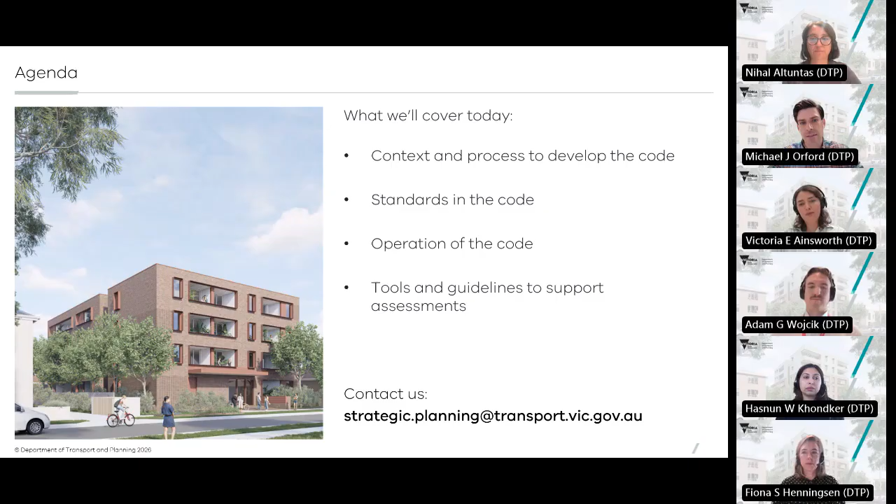Thanks, Michael. So before launching into the detail of the mid-rise code, let's take a brief look at why and how the code was developed. We'll cover the policy drivers, the intended benefits of the code, and what we heard through consultation.

So starting with the government commitments. The Department of Transport and Planning has supported the Minister for Planning to deliver on key government commitments by developing the mid-rise code. Starting with the housing statement, one of the key initiatives from the statement was to streamline planning approvals through deemed to comply pathways. The mid-rise code follows the townhouse and low-rise code in delivering on this initiative. The mid-rise code also contributes to another initiative in the statement, which is to strengthen design standards to ensure high quality builds.

The mid-rise code also plays a key role in supporting the Train and Tram Zone Activity Centres program by establishing a code targeted to the development scale that will be enabled through activity centre catchments. Finally, the mid-rise code also supports the delivery of the Plan for Victoria pillar, Housing for All Victorians.

So early in the process to develop the Mid-Rise Code, we identified the benefits it should aim to deliver, and I'll take you through those now. We were seeking to deliver more mid-rise housing in existing well-located neighbourhoods that have been identified for increased housing at this particular scale, so essentially more people can make better use of existing infrastructure.

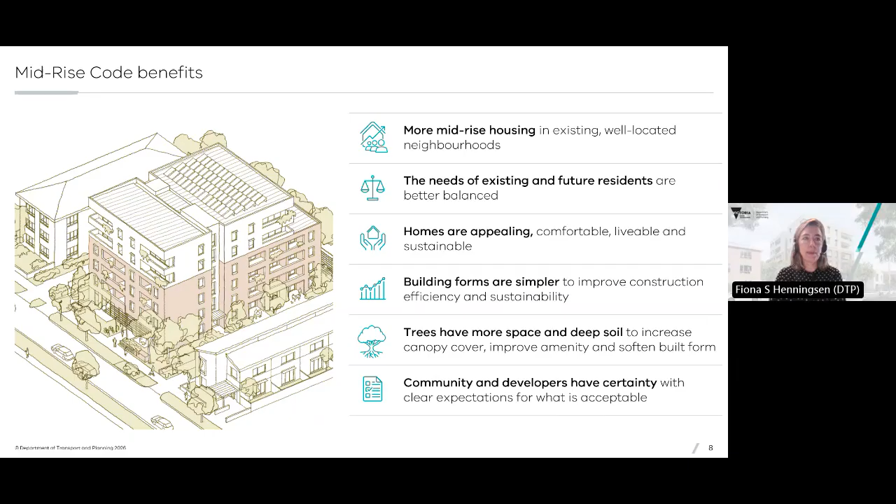Now let's have a look at how the code was developed. To ensure the code could deliver the benefits I've just outlined, we undertook some really detailed testing and analysis. On screen now is one of over 60 detailed architectural tests that was undertaken while we developed the Mid-Rise Code, and that was undertaken alongside economic modelling. So both of these tests considered a really vast array of aspects of livability, amenity and feasibility.

Alongside this modelling, we also convened a technical reference group, made up of experts from local government, design, planning and development industries. This group was really great in helping us test key challenges and opportunities and identify potential paths forward to refine the approach to the Mid-Rise Code.

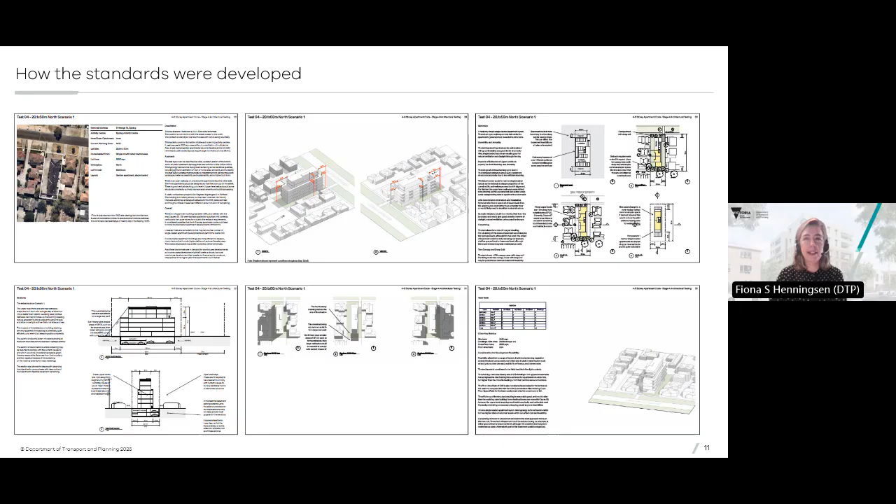The testing and advice also identified multiple options for a range of standards, which assisted with developing the draft provisions. This led us to a period of targeted consultation in September last year. The department undertook 6 weeks of targeted consultation, inviting feedback from municipal councils and peak industry groups. At that time, we shared some background on the proposed Mid-Rise Code, including the intended benefits of the code and the existing challenges and opportunities we had identified at that mid-rise development scale.

We shared proposed standards, and for many of these standards, we provided multiple options for how we could take the code forward. We also shared the proposed operation of the code. We received 42 submissions from local councils, peak industry groups and practitioners during this period, which really helped us greatly in refining and finalising the provisions. So thank you to anyone who's in attendance today that took the time to provide us a submission.

Now let's have a look at the assessment framework and how that will change with the introduction of the Mid-Rise Code. We're going to dive into this in more detail a bit later in the presentation, but just for now we'll work with this overview. Moving from left to right, on the left at 3 stories or less, there is no change.

When we move to blue, previously clause 57 had only applied to 4-storey residential development, and with the introduction of the code, clause 57 will apply to 4 to 6-storey buildings with a deemed to comply operation.

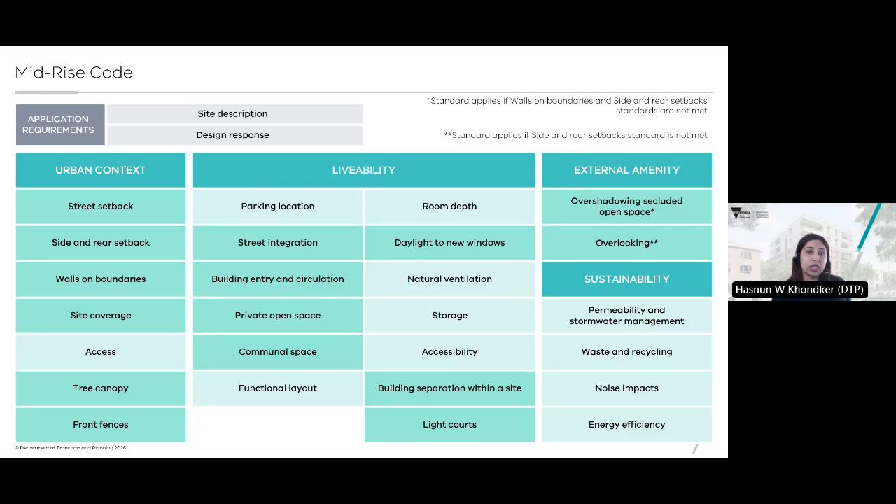First, I'll explain the site description and design response requirements. The objectives of each urban context standard in the mid-rise code refer to responding to future urban development instead of neighborhood character, which is different to the approach taken in Clause 55 neighborhood character standards and the existing or preferred urban context in Clause 58.

Clause 55 standards are compatible with neighborhood character, changing and evolving over time. Clause 58 is a discretionary assessment, where the urban context remains an important consideration. In contrast, Clause 57 is deemed to comply and is intended to facilitate a fundamentally different built form to what exists now. That is why the term future urban development is used in the mid-rise code.

An application must include a site description, a design response, and a landscape plan. A written statement outlining which standards are met and not met is also required.

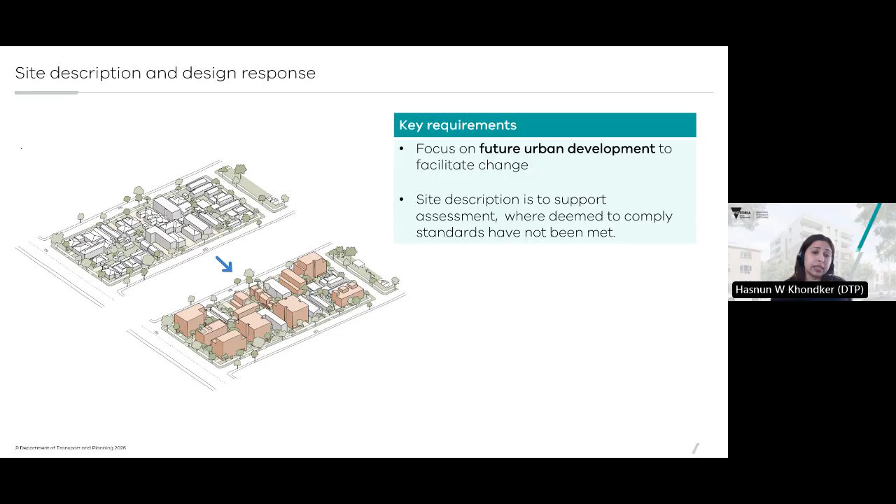Now let's look at the street setback standard. This standard requires a minimum of 4.5 meters from the front street and a minimum of 3 meters from a side street. It is also important to note that there is not a requirement for an upper level setback.

There are a few key benefits to these requirements. Firstly, the 4.5 meter setback provides adequate space for canopy tree planting, which improves the streetscape. It also supports simpler building forms, avoiding more complex wedding cake profiles that can occur with upper level setbacks. And finally, the standard can be varied in a schedule to the zone to a less restrictive requirement.

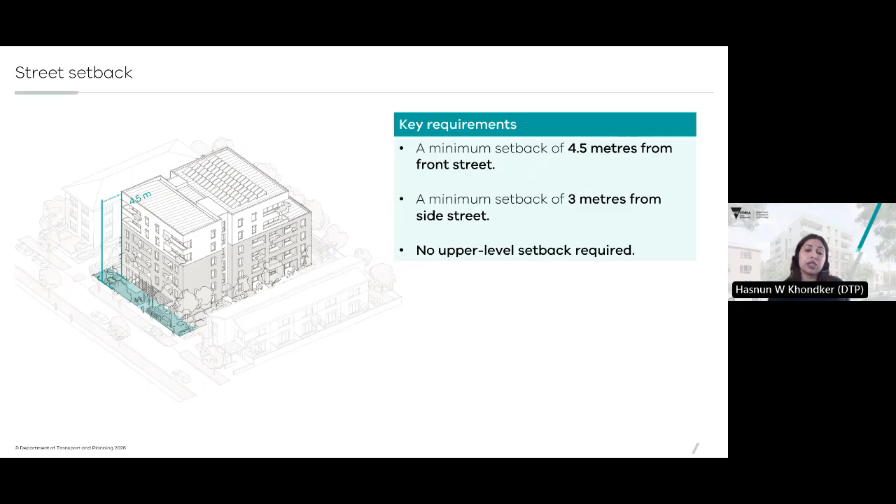Next is the side and rear setback standard. This standard requires a minimum 4.5 meters to the side or rear boundaries, which allows for sheer walls up to 6 stories. This setback provides a good balance between resident amenity, development feasibility, and sufficient space for canopy trees and landscaping. However, where a building is set back to a south boundary, increased setbacks are required, which is 6 meters up to 13.5 meters and 12 meters over 13.5 meters.

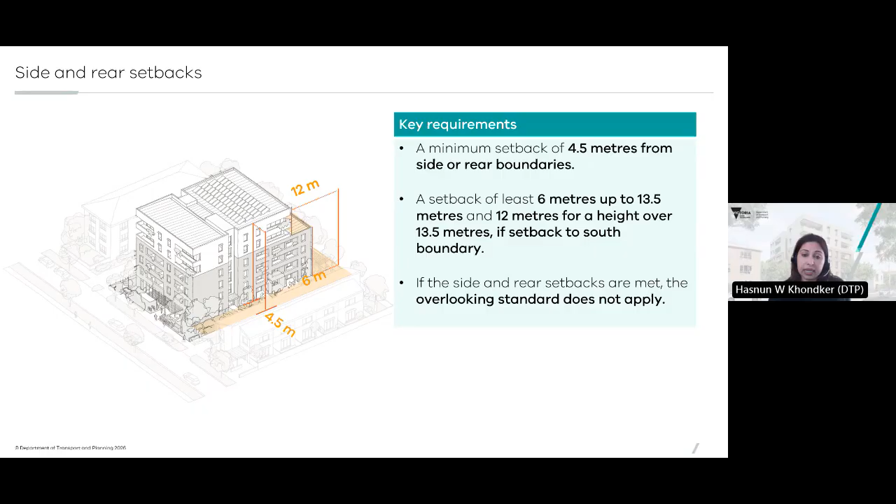These increased setbacks help minimize overshadowing to adjacent private open space. The mid-rise code guidelines set out how to assess a south boundary. It is also important to note that if the side and rear setbacks are met, the overlooking standard does not apply, which we will explain in more detail shortly.

Now, turning to the walls on boundaries standard. The standard provides greater clarity and flexibility and simplifies how wall length and height on a boundary are assessed. A new wall may be constructed on a boundary for 10 meters plus 25% of the remaining boundary length. Alternatively, it can match the length of an existing or simultaneously constructed wall or carport on the adjoining lot.

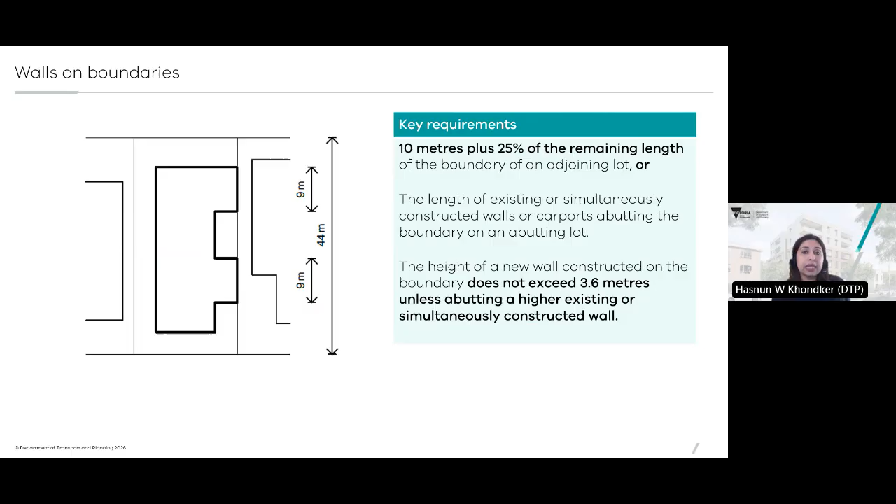The height of a new wall constructed on the boundary does not exceed 3.6 meters unless abutting a higher existing or simultaneously constructed wall. It's important to note that the average wall height requirement in Clause 55 has not been carried through to Clause 57. Looking at the diagram, the lot has a boundary length of 44 meters, which allows for 18.5 meters of walls on the boundary. This example complies as it provides 18 meters of wall on the boundary.

Next is the site coverage standard. The standard requires that buildings do not cover more than 70% of the site area. This ensures there is sufficient space for landscaping, deep soil, open space, and permeability. It also helps prevent overdevelopment at ground level while still allowing for feasible building footprints.

The diagram shows how site coverage is calculated, with the shaded area representing the building area that counts towards the site coverage. This includes roof structures such as the main building, roofed basement entries, and any communal sheds. Underground basements are excluded, as well as unroofed areas like accessways. This standard can also be varied to a less restrictive requirement in a schedule to the zone.

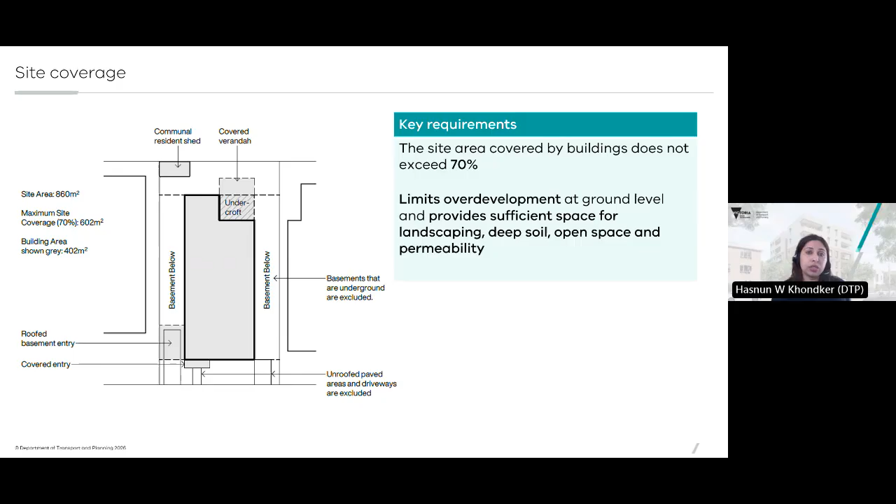Now let's look at the tree canopy standard. This standard is partly consistent with Clause 55, but has been updated to introduce basement setbacks to support better deep soil outcomes. Basements must be set back at least 3 meters from the front boundary and at least one other boundary, shown here at the front and rear in the diagram.

Basement ramps are permitted to encroach into these setbacks. The key benefit is that it increases the area available for deep soil planting, which supports larger canopy trees and improves long-term landscaping outcomes.

DTP is currently reviewing the tree canopy requirements in response to significant stakeholder feedback. The tree canopy standard will be updated in clauses 55 and 57 if the findings of that review are supported by the Minister.

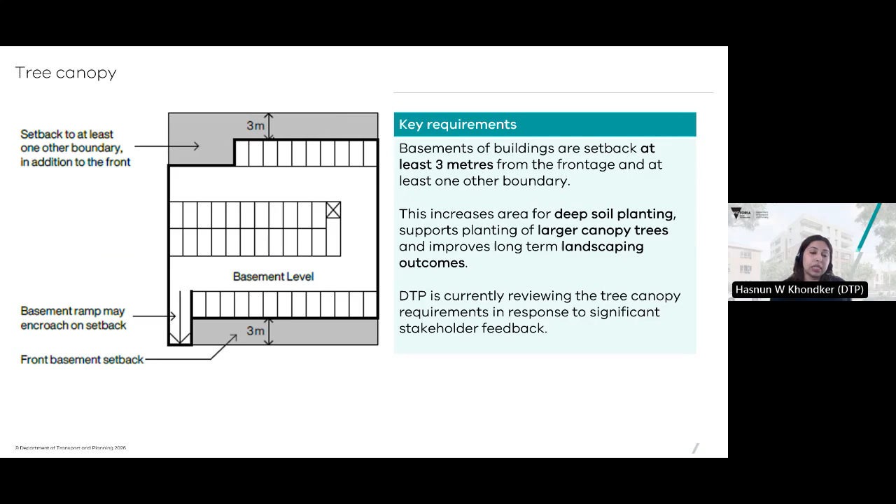Next is the front fences standard. This standard is mostly consistent with Clause 55, but it introduces a minimum 25% transparency requirement. The 25% transparency is measured when viewed perpendicular to the fence line. This means that if you stand on the street and look straight at the fence, at least 1/4 of it should be open rather than solid.

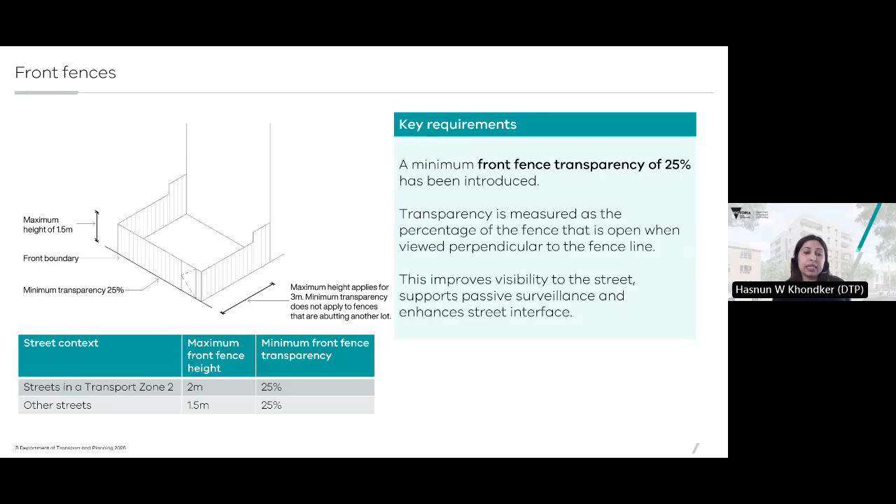The maximum front fence height is 1.5 meters for most streets, but on streets with the Transport Zone 2, it can go up to 2 meters. This improves visibility to the street, supports passive surveillance, and enhances street interface. Finally, this standard can be varied in a schedule to the zone.

Now moving on to the street integration standard. This standard focuses on strengthening the relationship between new development and the public realm to ensure buildings actively engage with the street. Firstly, developments are required to be orientated to front the street. This creates a clear relationship between the building and the public realm and avoids blank walls to the street.

It also strengthens passive surveillance by requiring at least one balcony or habitable room window at each story to provide a direct view to each street and any public open space. A direct view simply means there is a clear, direct line of sight to the street or public open space.

Pedestrian entries are to be located on street frontage. In addition, car parking areas and internal waste collection areas are to be visually concealed from the street. Finally, each dwelling is to have a mailbox and at least one parcel locker provided for every 5 dwellings, with

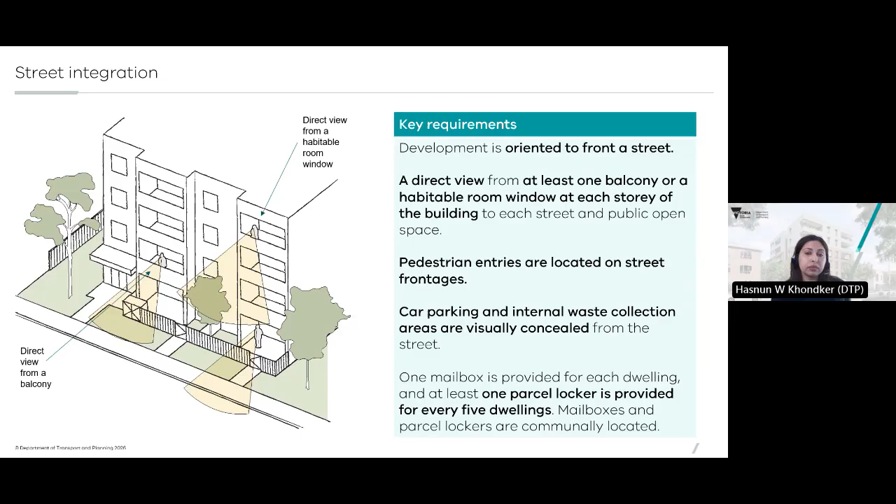these located communally. I will now pass on to Nihal to run through the remaining standards.

Thanks, Hasnun. The next standard is building entry and circulation. Pedestrian building entries must be clearly separated from vehicle entry points. This reduces potential conflict between vehicles and people to improve safety. As the diagram shows, the pedestrian entry is distinct from the car ramp.

Shared corridors and common areas are to have at least one source of natural light and ventilation. In addition, these areas must not be obstructed by building services. This ensures these spaces are functional, comfortable, and visually uncluttered.

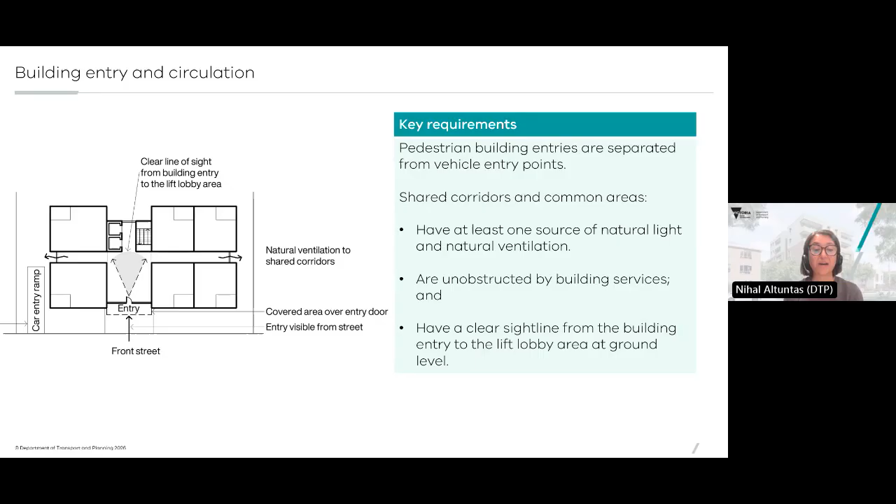Finally, there is to be a clear line of sight from the building entry to the lift lobby area at ground level. This improves wayfinding, increases passive surveillance within the building, and creates a greater sense of safety when entering the building.

Turning now to private open space. Ground level private open space is reduced to 15 square metres, aligning it with balcony requirements. Smaller minimum ground floor private open space for apartment typologies are likely to support larger shared communal outdoor spaces, so all residents can benefit from usable garden spaces. It also provides better opportunities for meaningful tree planting, increased canopy, and enhancing overall site amenity.

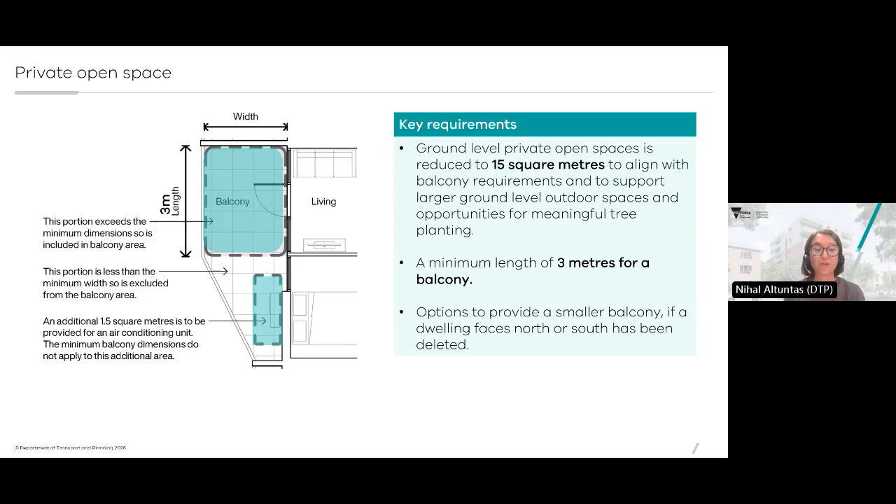A minimum balcony length of 3 metres is required to discourage narrow or deeply inset balconies that have limited functional use. The option to provide a smaller balcony if a dwelling faces north or south is removed, recognising that a 1.2 metre wide balcony provides limited usable space. Finally, the reference to secluded private open space has been removed to be consistent with Clause 58.

We'll now look at communal space. The standard requires developments of 10 or more dwellings to provide communal space that is accessible to all residents. This must be at least 2.5 square metres per dwelling, or 25% of the site area, whichever is the lesser. This aligns with the communal open space requirements in Clause 58.

Solar access requirements are integrated into the standard. Where outdoor communal space is provided, 50% of the area, or 25 square metres, whichever is the greater, is not to be overshadowed for a minimum of 2 hours between 9 a.m. and 3 p.m. on 22nd of September. This differs from Clause 58, which assesses overshadowing on 21st of June.

The 21st June assessment can favour roof terraces, making it more difficult to have communal space at ground level. While roof terraces can be effective, they often add cost and complexity, requiring ongoing maintenance and introduce long-term risks such as waterproofing failure. They also don't support canopy tree planting in deep soil or facilitate high-quality biodiverse landscapes. Roof terraces can also be less accessible than ground-level communal spaces.

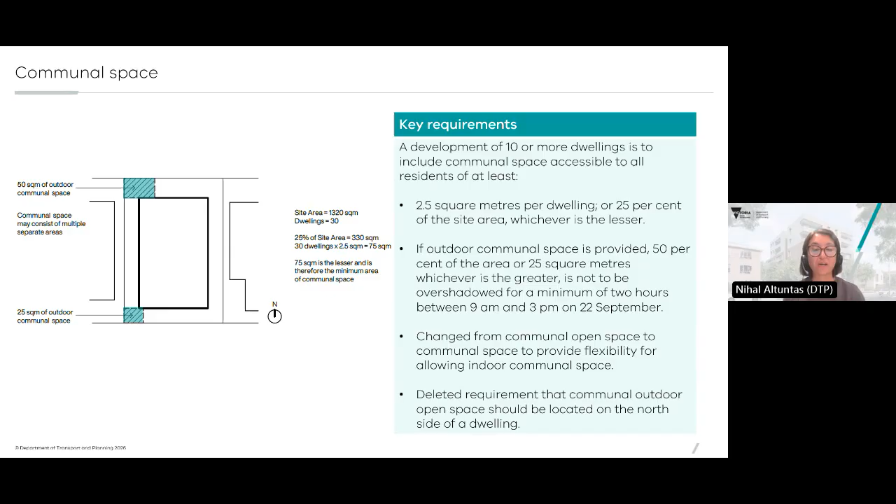Other changes include changing the communal open space to communal space. The requirement for communal open space to be located on the north side of a dwelling has also been removed. These changes are intended to provide flexibility and support a wider range of communal spaces, including indoor communal space.

The next standard relates to daylight to new windows. The standard specifies that habitable room windows are not located in basements. However, following stakeholder feedback, assessment of habitable room windows in basements has been included in the decision guidelines. This means a habitable room window can be located in a basement, but it is not deemed to comply and must be assessed on its merits.

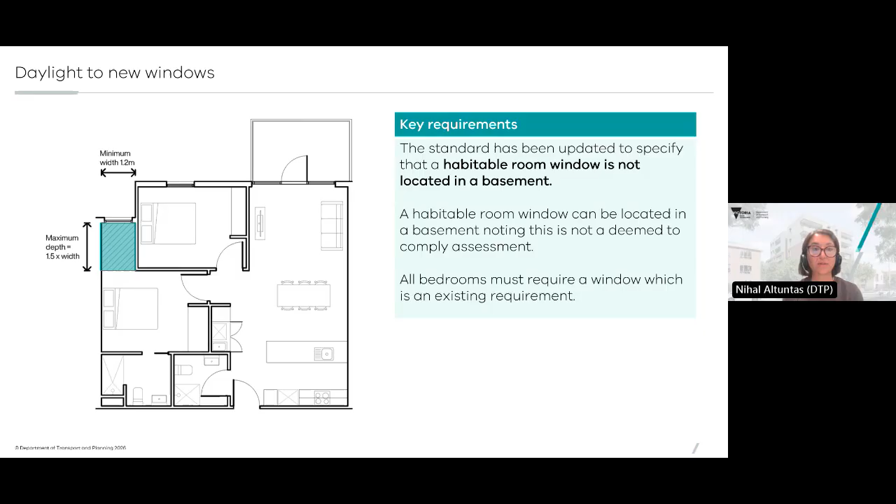There has been some criticism that the standard will allow for Harry Potter bedrooms, meaning bedrooms without windows. However, this is not the case, as all bedrooms are required to have a window.

This slide looks at the building separation within a site standard. This is a new standard that introduces minimum setbacks between buildings within the same site. It's intended to manage internal views, improve access to daylight, and provide outlook for living rooms and balconies in apartment developments. The standard requires walls containing a habitable room window or balcony to be set back at least 9 metres from other walls of buildings on the site.

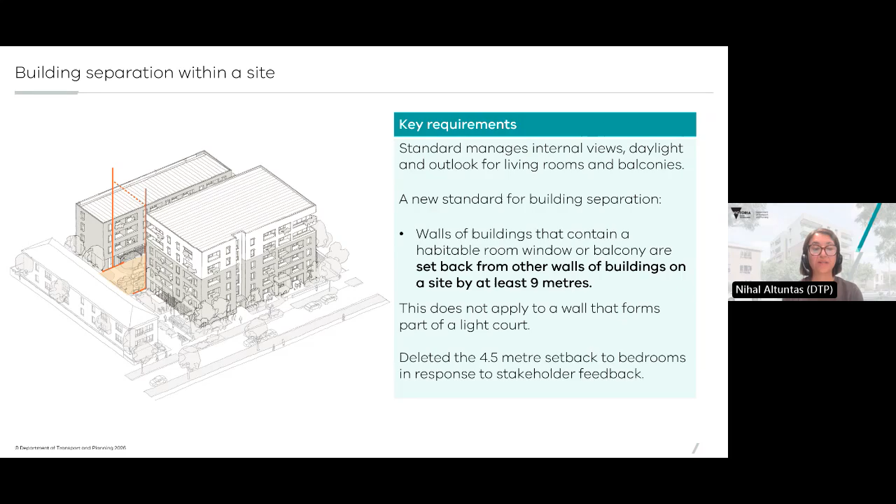This does not apply to walls that form part of a light court. In response to stakeholder feedback, the 4.5 metre setback to bedroom windows has been removed.

Light court standard is also a new standard. It is a form of building separation, providing clearer expectations for daylight through light courts. Light courts are for the primary light source to a bedroom or non-habitable room window. They may also be used as a secondary daylight source to living spaces.

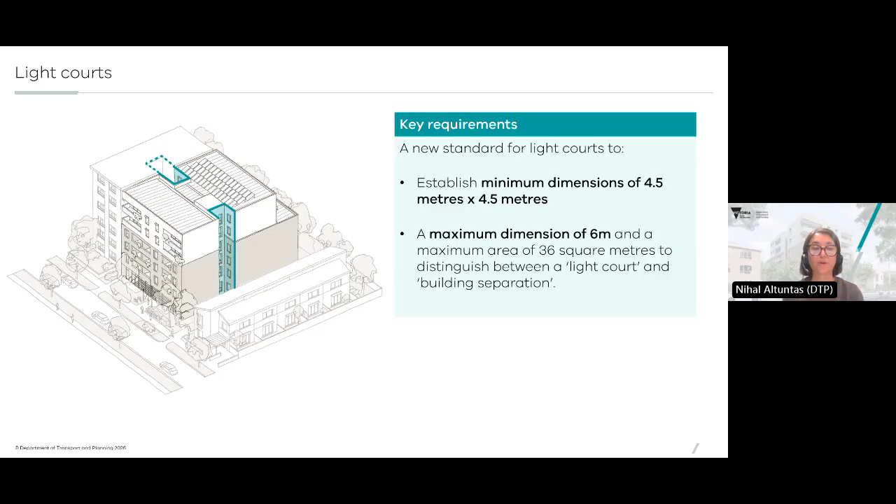The standard requires minimum dimensions of 4.5 metres by 4.5 metres. It also requires a maximum dimension of 6 metres and a maximum area of 36 square metres. This is to distinguish a light court from building separation. If the dimensions of the light court exceed 6 metres or 36 square metres in area, it is no longer considered a light court and must instead be assessed under the building separation standard.

Now I'll explain how to assess building separation and how it is different to assessing a light court. Starting with the diagram on the left, this shows two separate buildings on the same lot. Where a wall with a habitable room window or balcony faces another building, a minimum separation of 9 metres is required. The middle diagram shows a recessed building form.

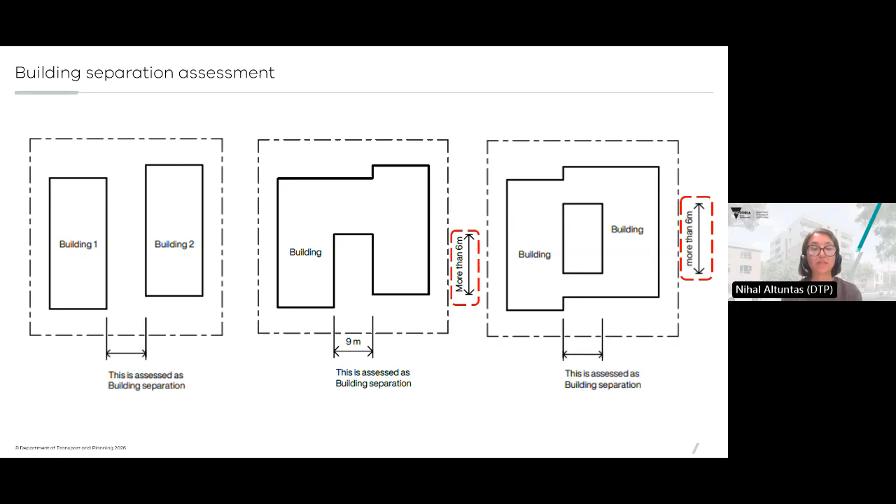Where that recess is greater than 6 metres and the internal facing walls contain habitable room windows or balconies, a minimum separation of 9 metres is also required. The diagram to the right shows an internal courtyard with a dimension greater than 6 metres. Where habitable room windows or balconies face into the courtyard, the width of the courtyard must be at least 9 metres. So in each case, once the dimension exceeds 6 metres, it is treated as building separation and the 9 metre requirement applies.

Let's also look at how light courts are assessed and how they're different to building separation. Starting with the diagram on the left, this shows bedrooms facing into a light court. The court has a minimum dimension of 4.5 metres and a maximum dimension of 6 metres. It is open to the sky and enclosed for at least 75% of its perimeter.

The diagram on the right shows a similar arrangement, with bedrooms also facing into a light court. Again, the maximum dimension is 6 metres, and the light court must be clear to the sky and enclosed for at least 75% of its perimeter. If the light court exceeds the specified dimensions, it should be assessed as building separation. If the light court includes spaces that are not a bedroom or non-habitable room, so usually a living room, it should be assessed as building separation.

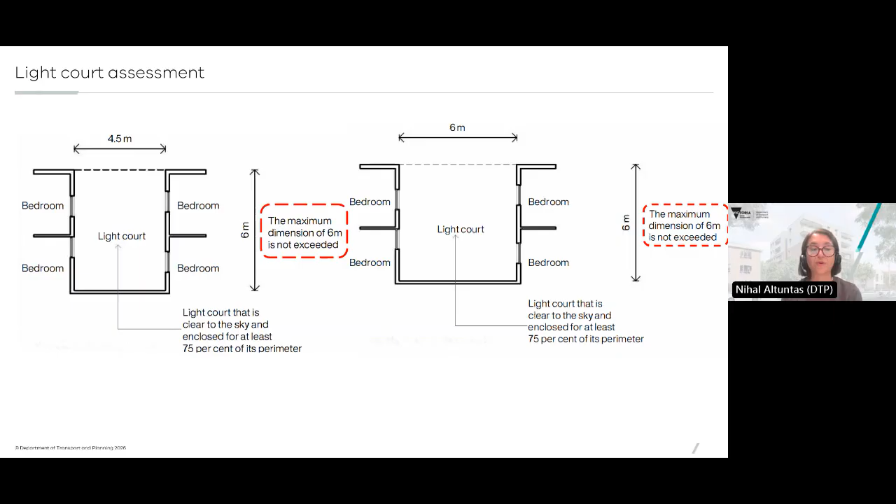DTP's mid-rise code guidelines on the planning website set this out in greater detail, and Adam will shortly talk more about those guidelines a bit later on.

Turning now to the overshadowing secluded private open space standard. This standard only applies when side and rear setbacks and walls on boundary standards are not met. The diagram shows the impact of overshadowing on a neighbouring property at 9 AM. Testing has demonstrated that the side and rear setback standards result in a reasonable balance between allowing building height and protecting neighbours from excessive overshadowing.

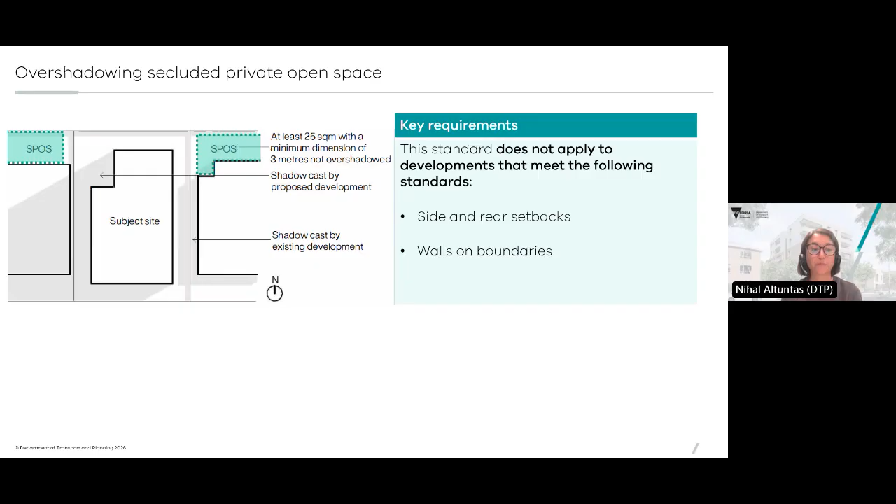Finally, the last standard that we'll go through in detail today relates to overlooking. This standard does not apply where the side and rear setback standards are met. However, if a development proposes a closer setback than what the side and rear setback standard requires, the overlooking standard applies, and an assessment of the overlooking standard is required.

The standard requires a minimum horizontal distance of 6 metres. Sill heights and obscure glazing must be 1.5 metres from the finished floor level. Importantly, a bedroom is included as a habitable room, which is different to clause 55.

That concludes the overview of the standards. I'll now hand over to Victoria, who will take you through the application and operation of the code.

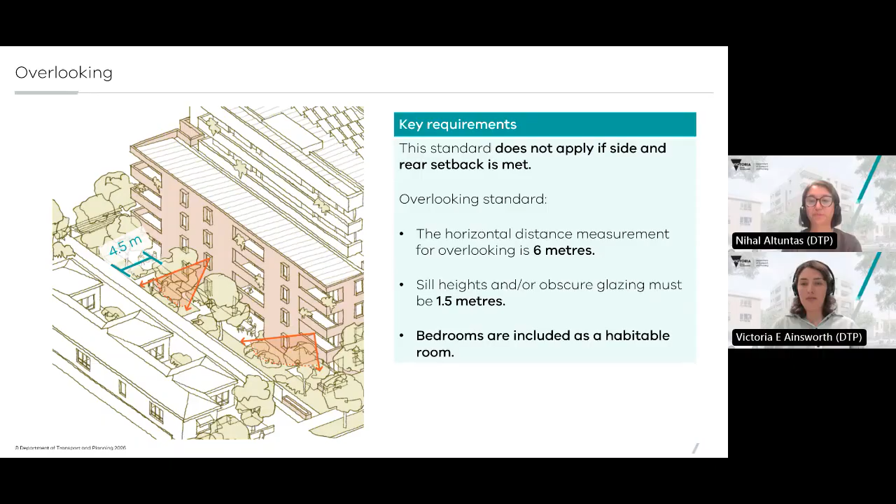Okay, thank you, Nihal. So as Nihal just said, I'll now step you through the application and the operation of the code.

However, Clause 57 may be considered through decision guidelines. Clause 58 now applies to development of 7 storeys or more instead of 5 or more storeys in residential zones, but the application of commercial, activity centre zone and special purpose zone remains the same.

The requirements of Clause 57 may be considered through decision guidelines in these zones. The application of Clause 55, or the Townhouse and Low-Rise Code, remains the same as before. It is also important to note that there are no circumstances where a VicSmart application would apply to Clause 57. And we know there are a number of local schedules to the general residential zone in a few councils that support development of 4 or more storeys, and DTP has been directed to undertake a review of these areas.

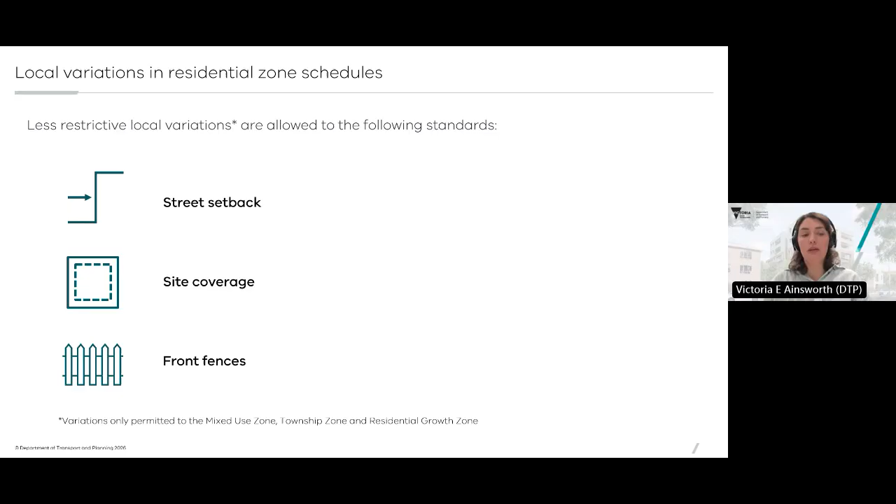Existing variations to Clause 55 standards will not be translated to apply to Clause 57. Now turning to overlays and how they operate with the Mid-Rise Code. There are no changes to the operation of other provisions of the planning scheme, including overlays and particular provisions like car parking and bicycle parking. Residential developments are still required to meet the requirements of any relevant overlay or particular provision that apply to the site or to the development, including planning permit requirements for land use, development, and heritage.

Clause 57 allows the Mid-Rise Code standards to be modified by a zone or a schedule to a zone, like activity centre zones or precinct zones. It also allows the Mid-Rise Code standards to be modified by an overlay or a schedule to an overlay, like the design and development overlay or the built form overlay. The key exception to this is the neighbourhood character overlay.

The objectives and decision guidelines of the neighbourhood character overlay continue to apply, as does the permit requirement to demolish or remove a building. However, unlike the Townhouse and Low-Rise Code, a neighbourhood character overlay cannot modify a standard of the Mid-Rise Code. For developments of 4 to 6 storeys, the Mid-Rise Code standards prevail over any modified NCO standard.

On to the deemed to comply operation and requirements. The operation of the standards follows a deemed to comply assessment pathway, which is the same as the Townhouse and Low-Rise Code. A development must meet all of the applicable objectives contained in Clause 57. If a development meets a standard, the corresponding objective is deemed to be met, and the responsible authority is not required to consider the corresponding decision guidelines.

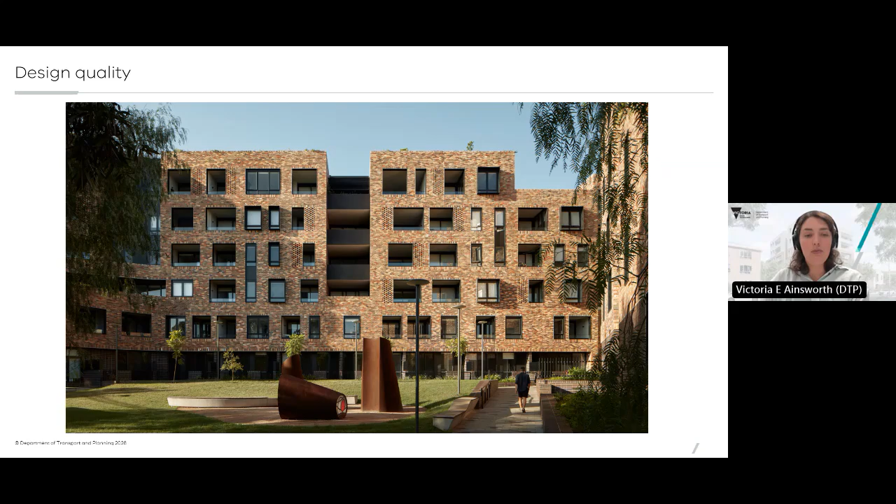The standards are also complemented by very comprehensive design guidelines, which Adam is going to speak to now. So now I will hand over to Adam to talk about the tools and guidance available to support you.

Thanks, Victoria. I will now step through the tools and guidance which complement and support the code reforms. A range of tools have been released to support the implementation of the mid-rise code and support industry practitioners in their application of these standards and the design and assessment of development proposals. It's also for members of the community to better understand and communicate potential outcomes for mid-rise developments.

The release of the Mid-Rise Design Guide is to support design thinking that complements the requirements set out in the code. It illustrates the many ways mid-rise residential buildings can fit comfortably in existing neighbourhoods, providing good amenity to both new and existing residents. It is intended as a practical tool to support design thinking and complement the requirements of the mid-rise code, helping to achieve high-quality, site-responsive mid-rise development.

I'll now run through how the Mid-Rise Design Guide is intended to be used and how it can help support you. The guide contains 4 parts: site design, urban interface, building design, and dwelling design. I'll now take you through those 4 parts, and as I do, I'll give you a snapshot of some parts of the design guide.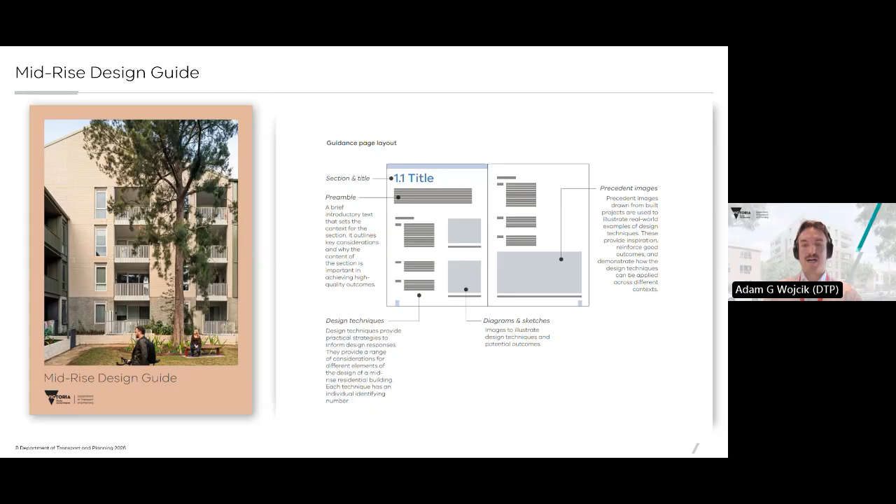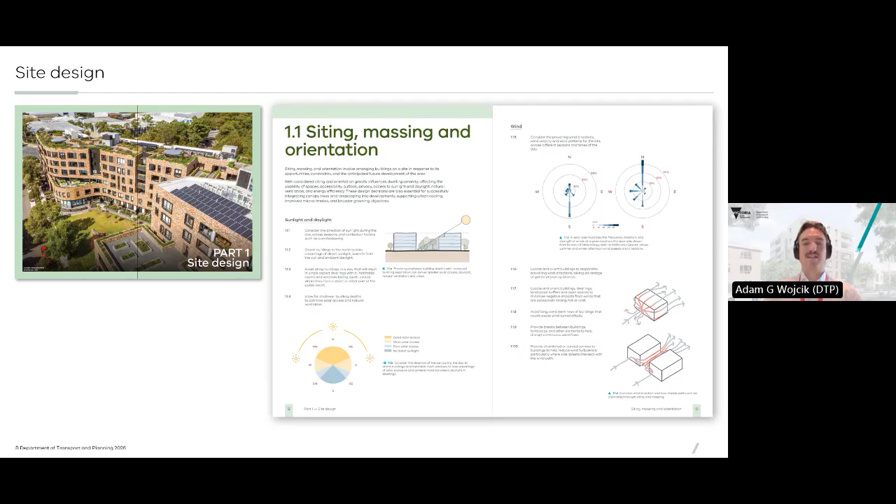Part 1 is about site design. This section provides design techniques on how consideration of the site and broader context informs site-specific design decisions. This section covers sunlight and daylight, wind, existing site features, levels and topography, and views. This part of the guide is useful to understand how new mid-rise development should respond to their context and what makes a well-sited development.

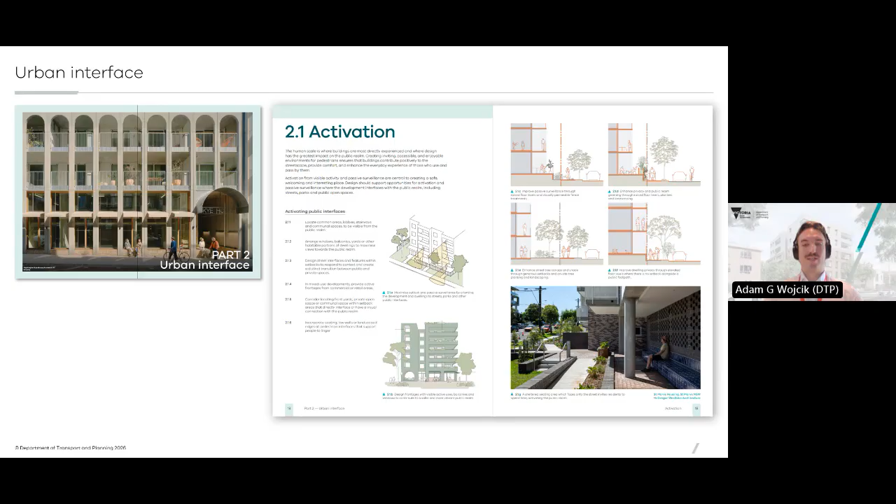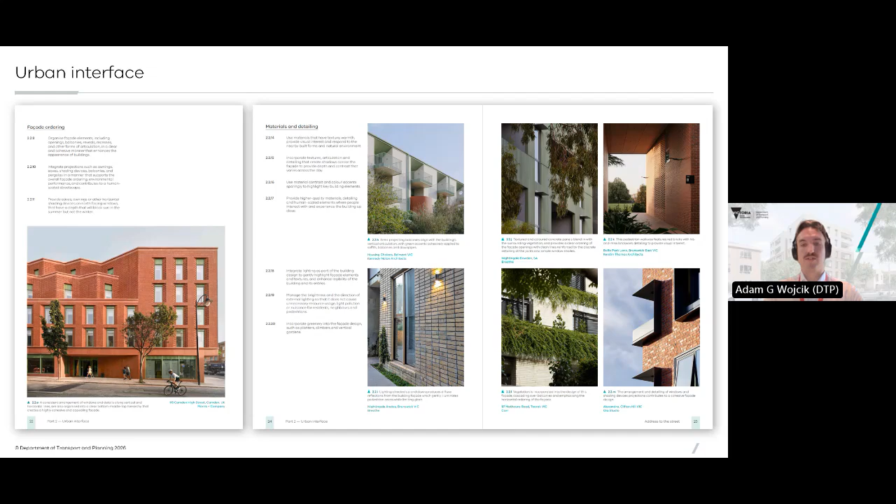Part 2 is about the urban interface. This section provides design techniques for buildings to connect with and contribute to the street and surrounding public spaces. This chapter covers activation, address to the street, landscaping, and entry and access. There is a lot of useful guidance here about creating active frontages, providing passive surveillance, and how to order and detail a facade with clear and practical solutions to communicate with practitioners, designers, and developers.

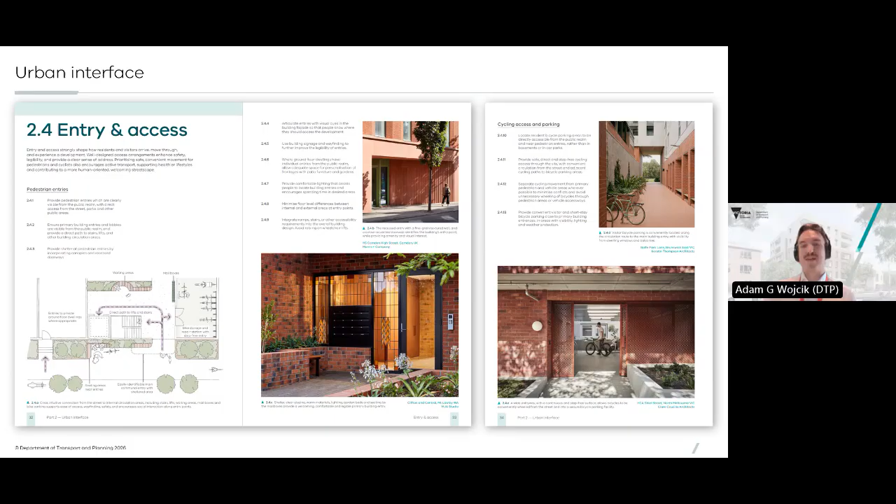This section is also useful for understanding how people experience mid-rise development from the human scale and how mid-rise development can contribute to an area and provide a positive address to the public realm.

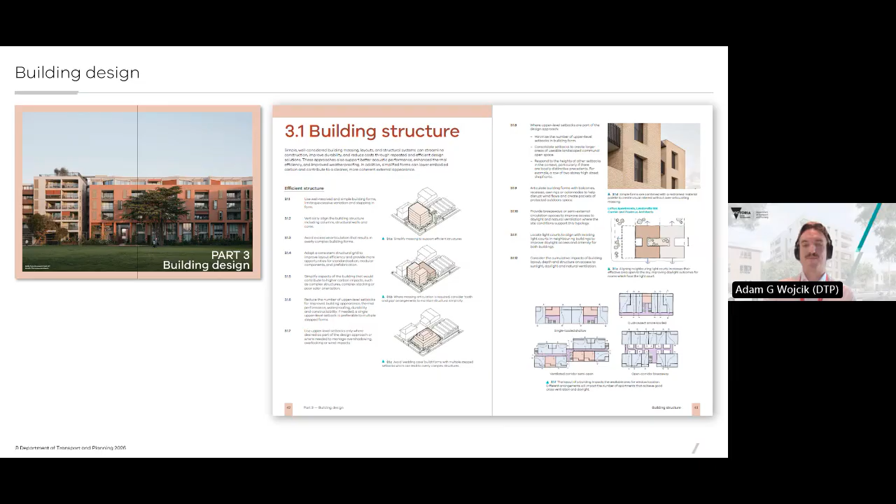Part 3 is about building design. This section addresses the design of apartment buildings in more detail. It focuses on building structure, layout, and communal spaces, as well as materials and site services. This section is useful for understanding how a mid-rise development can be set out to achieve efficient construction, a convenient layout, and enhance the overall livability and experience of a building for occupants and visitors.

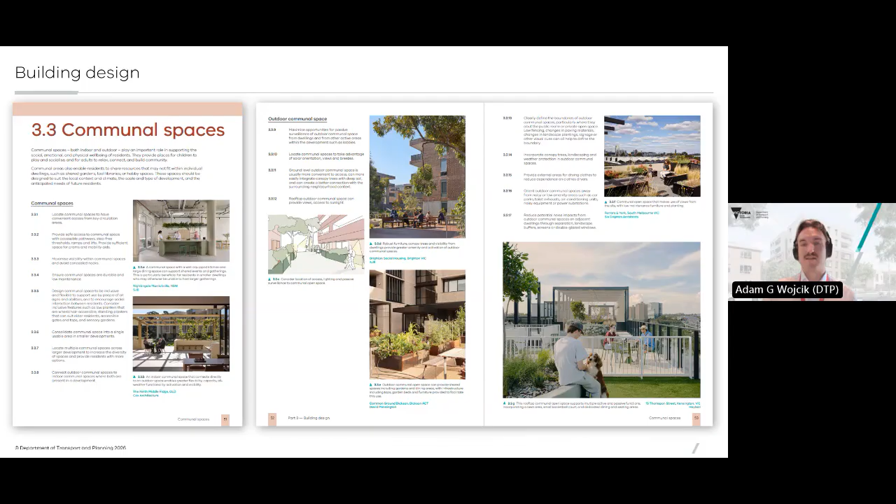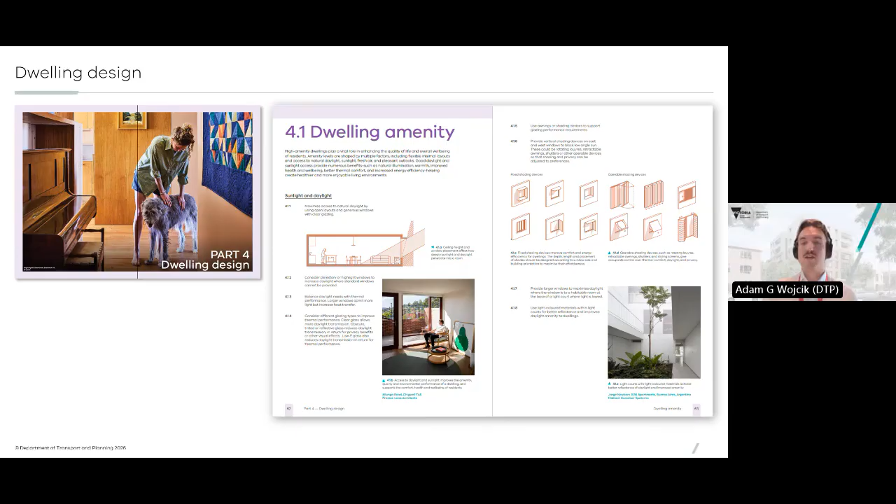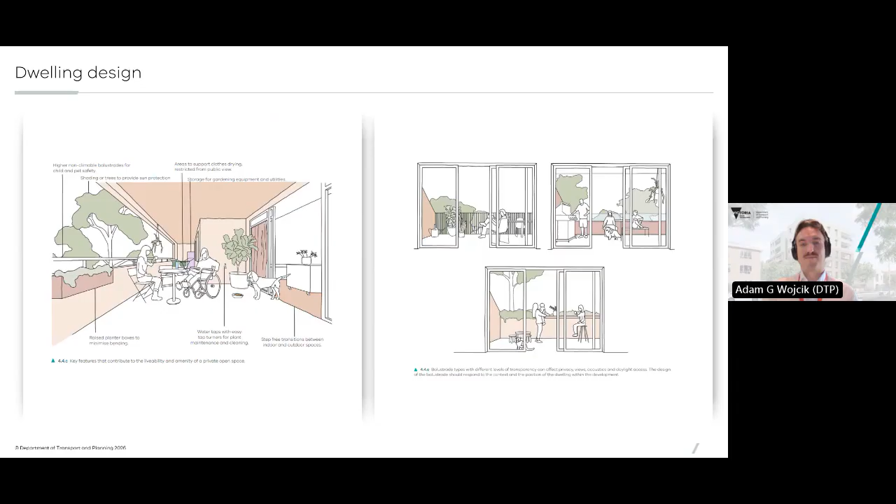Lastly, Part 4 is about dwelling design. This chapter provides design techniques for functional and comfortable living environments for residents, visitors, and the community. This chapter covers dwelling amenity, which provides practical guidance for achieving good daylight, sunlight, natural ventilation, thermal comfort, privacy, and outlook in dwellings. This chapter also covers dwelling diversity and flexibility, dwelling layout, and private open space. This final chapter is useful for understanding what good mid-rise development looks like for occupants and how individual dwellings can be designed to enhance livability.

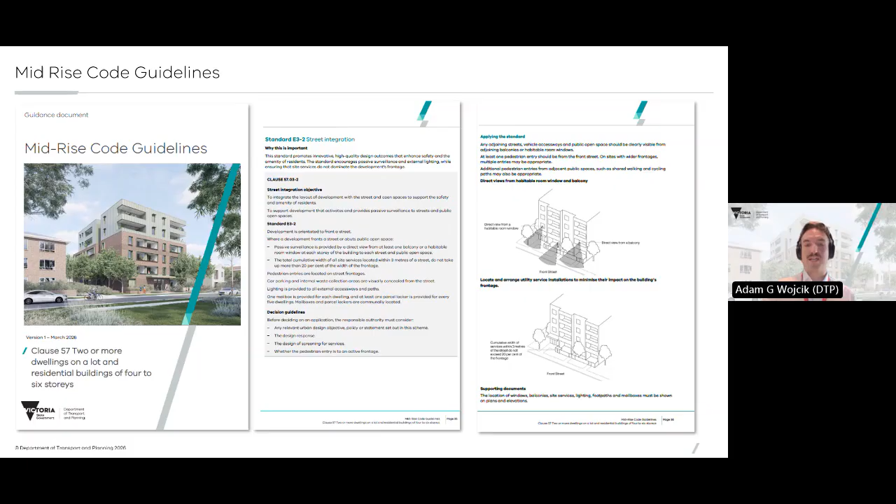DTP has also prepared the Mid-Rise Code guidelines to support practitioners. This is similar to planning practice notes that you may already be familiar with, however it is a lot more comprehensive. It matches the guidelines prepared for the Townhouse and Low-Rise Code. The purpose of the Mid-Rise Code guidelines is to inform the interpretation and application of the Mid-Rise Code standards, and includes annotated diagrams and detailed written explanations about how the standards operate and how they can be met.

Finally, we have updated our website, planning.vic.gov.au, so that anyone looking to find more information about the Mid-Rise Code can start here. We'll be holding training sessions to help understand how to apply these new provisions, so keep an eye out for those session dates. You can also find links to the Mid-Rise Design Guide and the Mid-Rise Code guidelines on the website. And with that, I will hand back over to Michael and to Giorgio. So thank you very much.

Yes, thank you very much, Michael, and also thank you for all your contributions. It's a very comprehensive presentation, so very informative. Now, I don't have any specific questions that I could see unless there's some that come up, but well, actually one just came up now.

In the meantime, we did receive a query whether this presentation could be made available. We will certainly leave the recording of this webinar like we always do on the ARBV. Whether we'll provide these particular slides or not, Michael, I'm not sure, but I do note that you have plenty of information available, including the guidelines that were just introduced. So I wonder if it's possible somehow to relay this as an introductory slideshow to our audience.